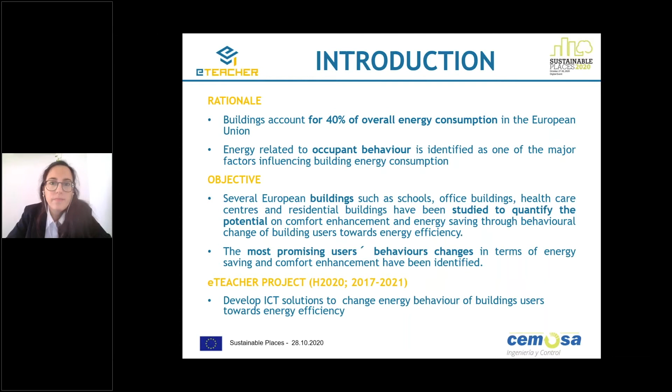The methodology: we have intensively monitored 10 buildings during 8 months, from February to September 2019. The kind of measurements we have collected is at building level and at room apartment level. We have collected energy consumption data on HVAC, on appliances and lighting, and also the total energy consumption of the buildings.

We have collected data related to indoor conditions of the rooms and apartments - temperature, CO2, lighting level, relative humidity. We have also collected outdoor conditions - temperature, solar radiation, and relative humidity - and other parameters such as occupancy or windows open have also been collected.

This is the experiment design and the pilot buildings. I want to talk shortly about the pilot buildings. We have 2 schools in Spain, one residential building in Spain and 4 residential buildings in Romania, 2 healthcare centers in Spain, and also 1 office building in Spain.

The kind of monitoring technology that we have used in our experiment - this is just to illustrate the kind of technology. We have used several solutions existing in the market. For example, this is the monitoring in one of the apartments in Romania. We have used, in this case, Homematic and Netatmo technology.

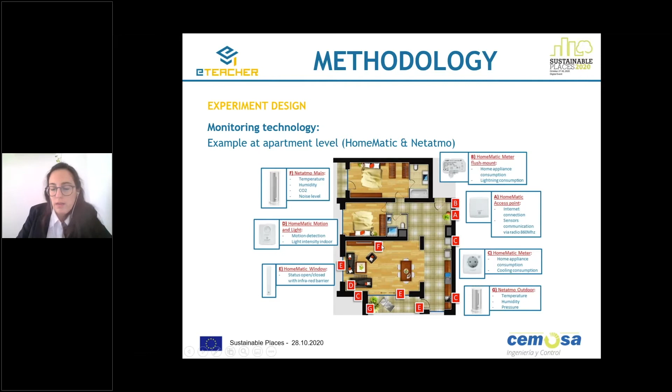This is one example of the monitoring technology that we have used. Another example is this one. Here we see the monitoring devices that we have used at building level, and here we see the monitoring devices that we have used at room level.

At room level, we have used Z-wave technology for temperature, CO2, and relative humidity, for windows opening, for presence and luminance meter, for appliances submetering, lighting submetering, and the temperature of the fan coils.

We have also used at building level a weather station based on Z-wave technology, which is wireless technology in this building. And then we have used some wire technology that uses RS485 to measure the general electric energy meter, the HVAC energy meter, and the lighting energy meter.

This is just to illustrate the kind of technology that we have used. I just wanted to mention that we have used commercial solutions in all the buildings. In general, we have used more wireless technologies than wire technology. This is to provide an idea of the kind of monitoring devices.

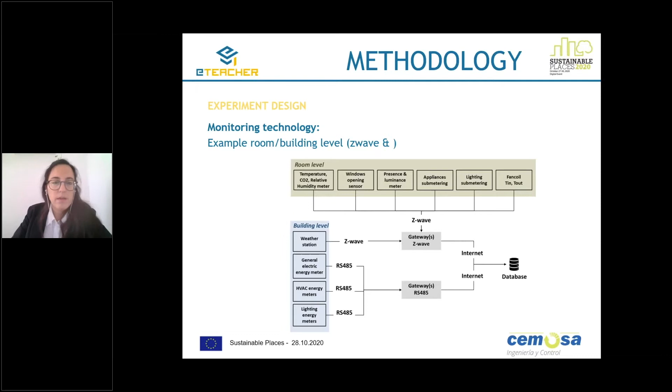I want to talk now about the comfort analysis that we have carried out to quantify the enhancement potential. We have focused on four variables: indoor temperature, indoor relative humidity, indoor luminance, and indoor CO2 levels. And we have set some thresholds based on the standards.

For the temperature, the comfort threshold is between 21 and 26 degrees. For relative humidity, it's between 40 and 60%. For indoor luminance, we have set a threshold of over 500 lux for all the buildings except for the residential building, where the limit is lower, over 150 lux. And then for the CO2 level, our threshold is below 800 ppm.

And how we calculate the potential to enhance comfort: we have calculated the number of hours where the rooms are occupied, and these variables are out of the thresholds where comfort is guaranteed.

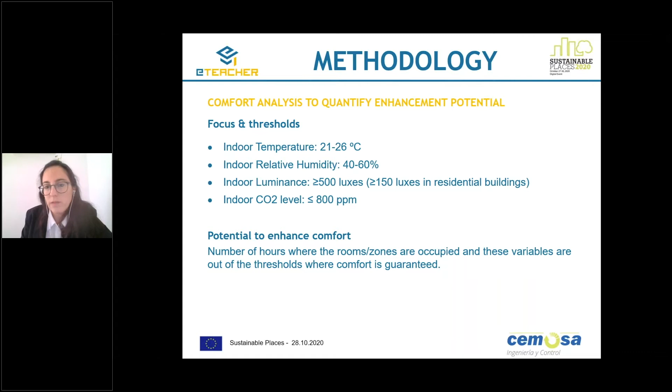Okay, this is the analysis for the comfort, and then the analysis to quantify the energy saving potential. We have defined a number of target behaviors.

For example, related to the use of the lights, we define two target behaviors: turning off lights when leaving a room or at the end of the day, or target behavior 2, which is reduce the use of unneeded lights, checking lighting levels and needs during the day.

Then related to the appliances, we have defined two target behaviors as well: turn off appliances at the end of the day, and appliances off when away from room for 1 hour or more.

Related to the HVAC use, we have defined 5 target behaviors: reducing the thermostat temperature for heating when overheating, increasing thermostat temperature for cooling when undercooling, ensuring that if heating or cooling is on, windows and doors are closed, turning off the HVAC system if the room is not used for more than 1 hour, and ensuring the air conditioning and heating are not working at the same time.

Okay, so the way we have estimated the energy saving potential is based on the monitoring data. We have counted the number of hours that these target behaviors are not carried out by the users of the buildings. Then we have calculated the energy wasted during those hours, and finally the cost of the energy wasted during those hours.

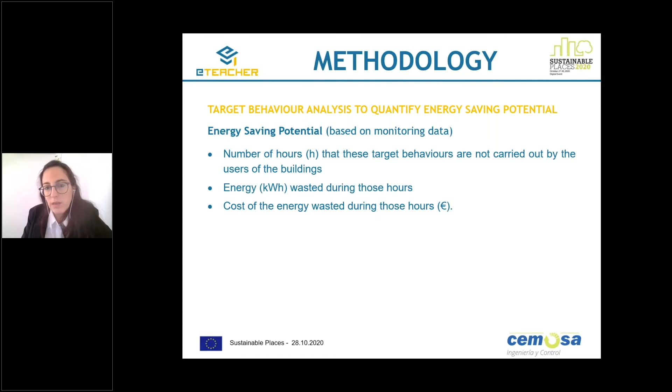For example, for target behavior 1, which was turning off lights while leaving a room or at the end of the day, we count the number of hours in every monitoring room that there is no one and the lights are on. In this case, we use two monitoring variables: presence and lighting consumption. So when the presence is 0 and the lighting consumption is over 0, then we count that hour as this target behavior not being carried out.

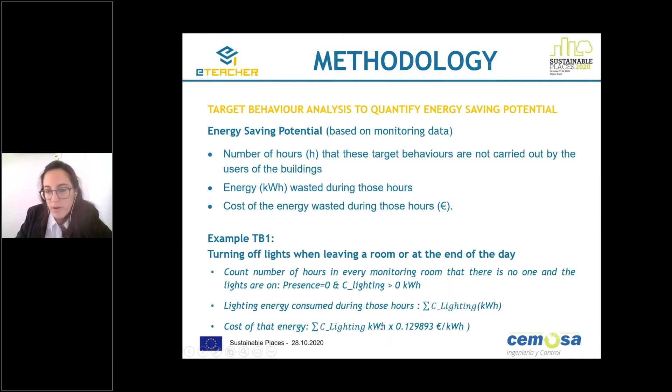Then we calculate the energy consumed, the lighting energy consumed during those hours, and finally we calculate the cost of that energy, just multiplying by the price of the energy at that time. So this is an example.

And then I will present some results related to the comfort analysis and the potential to enhance it, and the energy saving potential. I'm not going to explain the results of all the buildings, I just focus on 4 buildings. But then in the conclusions, I will provide an overview of all the buildings, because otherwise it's too repetitive.

Okay, so in the case of the office building in Spain, we have in this graph, we have monitored 2 of the 2 floors, which are big offices.

So this is the data related to floor 1, this is the data related to floor 2, and this is the data related to both floors. These are the percentage of occupied hours where there is no comfort because of temperature, relative humidity, CO2 levels, or lighting level.

Just to clarify, since it's too small to read, this is 100% of the occupied hours, this is 20% of the occupied hours. What we can see here is the main problem related to comfort is the lighting level. About 70% of the occupied hours are out of the lighting level range, and regarding relative humidity, also about 60% of the occupied hours are out of range.

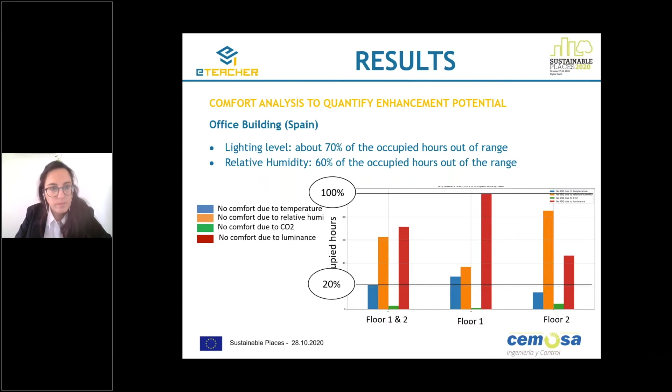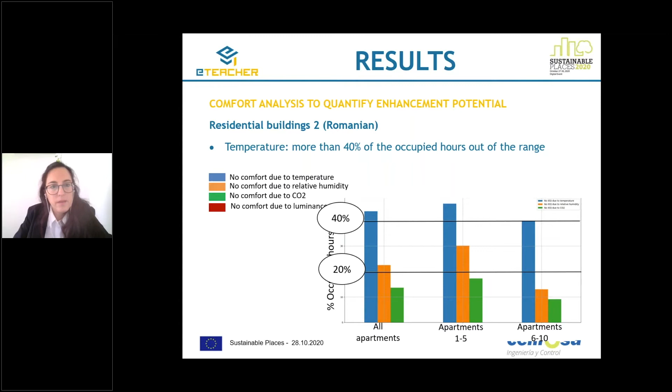So these are the results relating to comfort that I wanted to show.

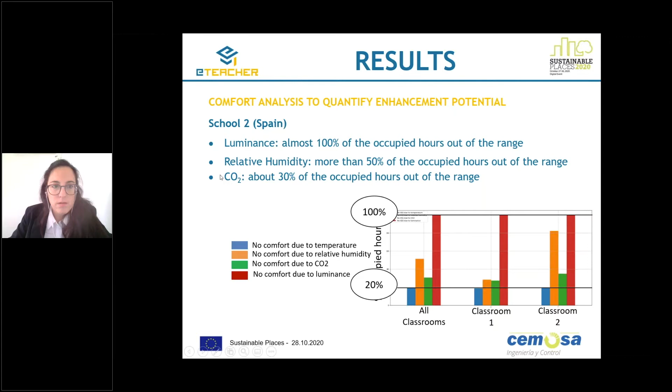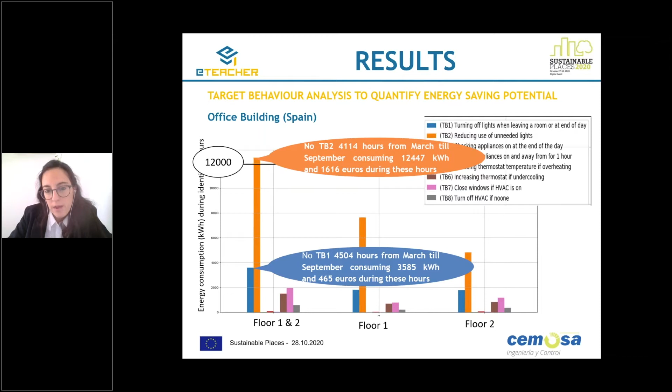Regarding target behavior 1, which is turning off lights while leaving a room or at the end of the day, this target behavior was not carried out during more than 4,000 hours from March till September, which means we could have saved more than 3,500 kilowatt hours and more than 400 euros during these hours. The conclusion for this building is that the target behaviors with higher energy saving potential are those related to the use of lighting.

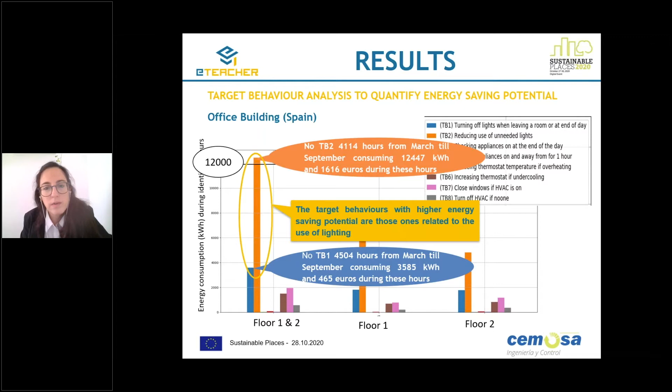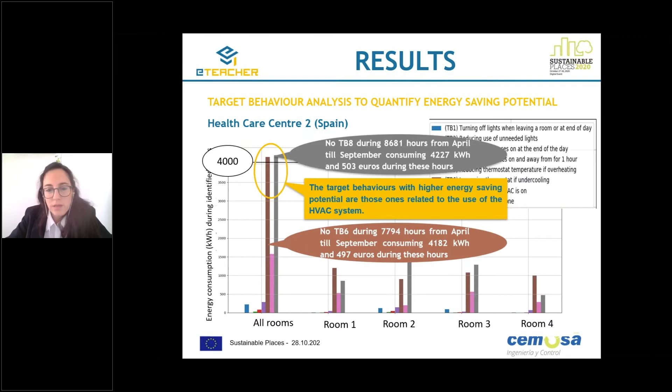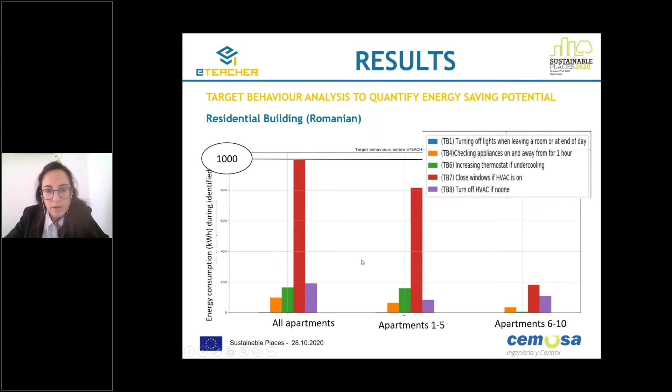So this means that the higher energy saving potential is related to the use of the HVAC system in this case. Regarding the 4 residential buildings in Romania, this is 1,000 kilowatts hour, and we can see that the main problem is related to closing the windows if HVAC is on. This happens during more than 900 hours, and they could have saved 900 kilowatts hour and more than 100 euros.

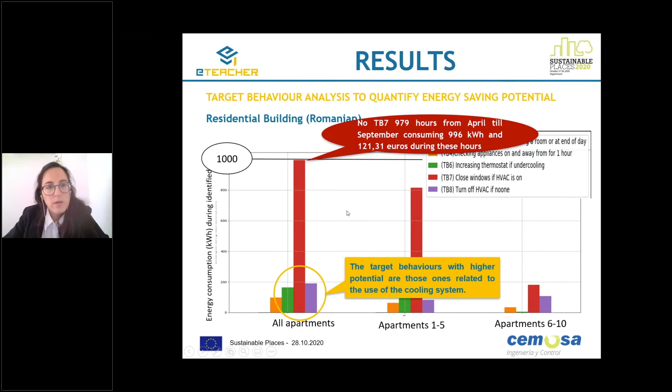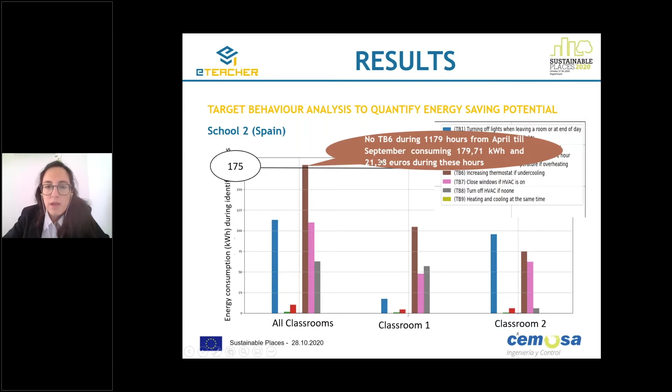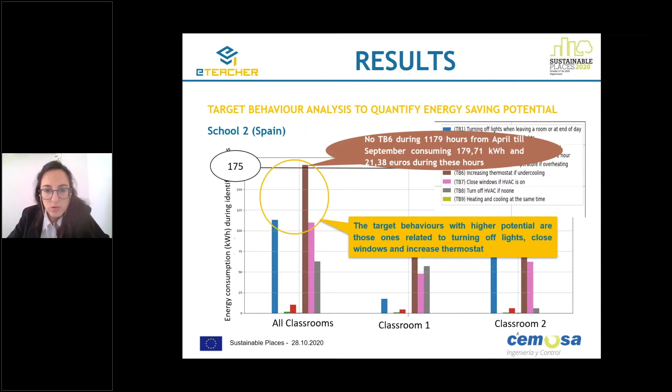And the target behaviors with higher potential are those related to turning off lights, closing windows, and increasing thermostat. So the conclusions show that regarding comfort, here is the percentage of occupied hours that comfort is not achieved because of one of these reasons: temperature, relative humidity, CO2, or luminance in each of the buildings.

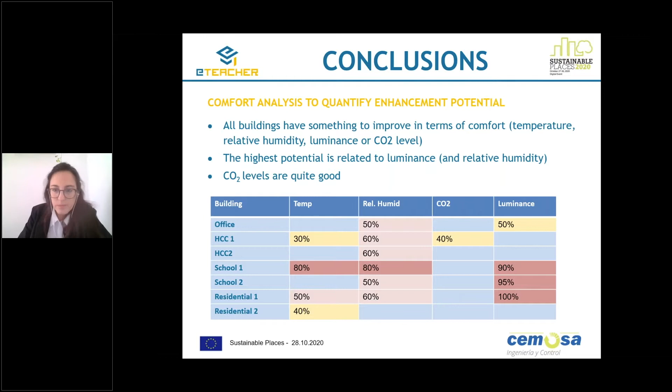We can see that all the studied buildings have something to improve in terms of comfort. In the case of these buildings, it seems the higher potential is related to luminance. And we were also surprised because we have seen the CO2 levels are quite good in this case. So this is good and important.

Regarding the target behaviors, the red color are those target behaviors more promising in terms of energy saving potential. So we clearly see that the most promising are those related because they happen more and because they have more saving potential. These are related to the cooling system, specifically increasing the thermostat if undercooling, closing windows if HVAC is on, and turning off HVAC if no one.

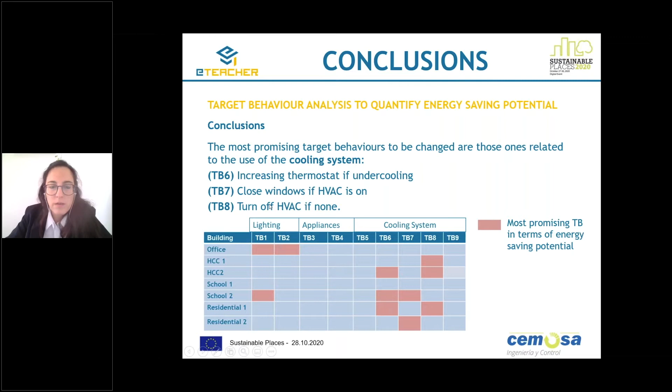And the next step is to check other weather conditions. We are also including now an office and a school in UK, and also to deploy these ICT solutions developed by the eTeacher project to see if we can really take advantage of this energy saving potential. This is the eTeacher demonstration that has started this month, at the beginning of this month, so we will see what happens.

And finally, to validate this analysis with the results of the eTeacher demonstration to see if this analysis is right. And that's it. Thank you very much. If you have any question, I'm happy to answer.

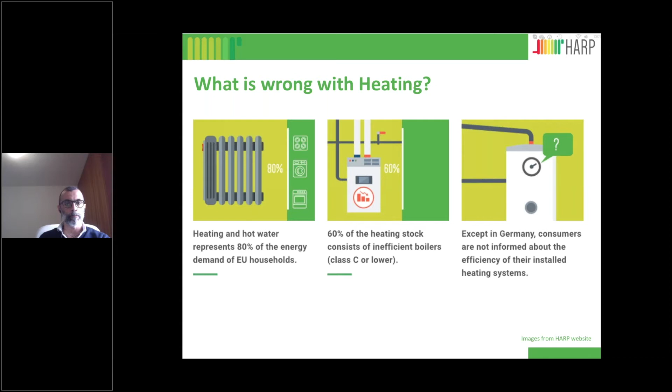And we believe this information is crucial to trigger a replacement of the least efficient heating appliances. So in order to investigate this problem, the HARP project was designed with the main aim of raising consumer awareness about the inefficiency of their heating systems in particular. The project basically helps consumers to understand the level of energy efficiency of the installed appliance and what they can obtain if they decided to change for a more sustainable and efficient version.

There are two principal objectives of the project. One is to increase the replacement rate of old appliances and therefore reduce associated energy consumption in the 5 countries where HARP is being developed. The second objective is to draw lessons from the implementation of a labeling scheme that is produced within the project, of course.

So, HARP will mainly build on the experience of the mandatory labeling that is already in place in Germany.

The purpose is that recommendations will be used for the implementation of labeling methodologies for installed heating systems at the European level, but more specifically in countries not participating in HARP.

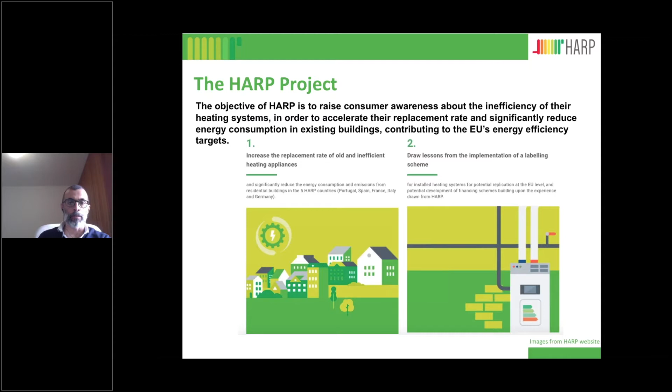The HARP project is being developed by 18 partners from 5 countries: Portugal, France, Italy, Germany, and Spain. There are a lot of partners, as you can see, but it's coordinated by ADENE, which is the Portuguese National Energy Agency. It runs from 2019 to 2022.

As a main output, we set out to develop an application that will provide consumers with an indicative assessment of the performance and cost of their heating system, and we'll also be able to compare alternatives in the market.

There is, of course, work being developed in terms of the typified quantification of existing heating appliances in these 5 countries, for instance. But in this project, we wanted to take it a little further and try to tackle issues that are normally not addressed in this kind of study.

The most common argument for the promotion of energy efficiency investments, such as the replacement of heating systems, is mainly related to the potential energy and economic savings that are achieved. This is the main argument.

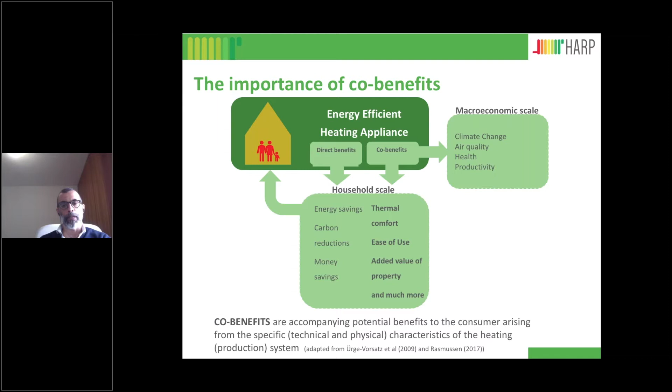And there is the more private perspective, if you want, at a household scale, for instance, that is from making the decision to adopt energy efficient technologies, which is known to be strongly connected with these additional benefits that can range from thermal comfort, easier use, added value of the property, things like that. So we wanted to address that.

We realized that although it's important, and it's really recognized in the literature and research, it's not a very well explored area at this scale, at least. I think the macroeconomic scale is more developed, but at the private perspective it's not so much.

So in order to have a clear picture of what's important in each national context of HARP, we set out the methodology for our study. This included a first literature review in order to identify the co-benefits that should be included in the analysis.

Then we tried to clarify our objectives. We wanted to understand what is the relevance of each co-benefit for the users or consumers, and how these co-benefits can be valued, because normally the value of investments is just analyzed in terms of economic and energy savings, in terms of economics in general.

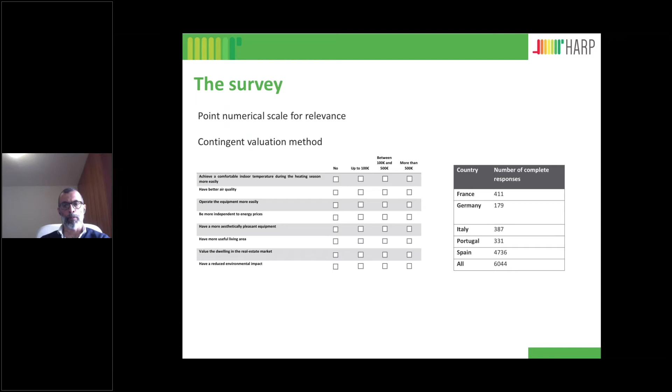The results were analyzed using a weighted average value for age, gender, and country. So every completed answer was considered.

In terms of results, our analysis so far allows us to produce a first view on the problem. In terms of degree of relevance, we can observe differences regarding the relevance given to a determined co-benefit depending on the national context. For instance, Italy has the lowest value regarding the relevance of ease of use, but one of the highest in terms of thermal comfort.

As expected, thermal comfort is really relevant in all contexts. On the other hand, results regarding Germany suggest a low degree of relevance regarding aesthetics, but independence from energy price as a co-benefit is highly relevant.

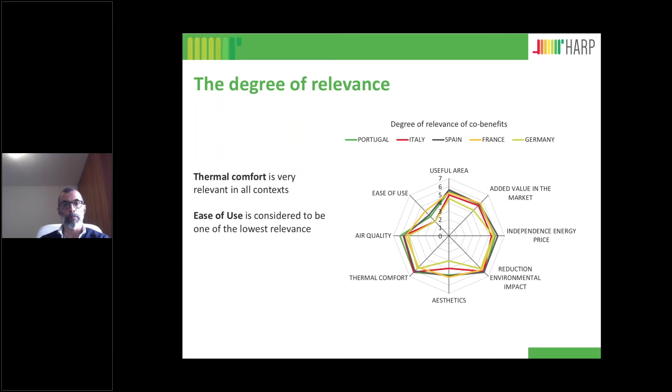We also realized from the respondents' answers that men, on average, attribute less degree of relevance to the identified co-benefits than women. We analyzed all the results per gender, per income, and per age - I think this was the most interesting, bringing in gender and income.

Another perspective to highlight the problem is when you look at relevance by income levels in each country - there are significant differences regarding levels of income in some national contexts. For instance, in France, respondents with a lower level of income, which we established at a threshold of 2,000 euros a month maximum, attribute lower degree of relevance to the majority of co-benefits, except for ease of use. Another interesting point is the attribution of higher relevance to added value in the market from respondents with a higher level of income, in Germany for instance.

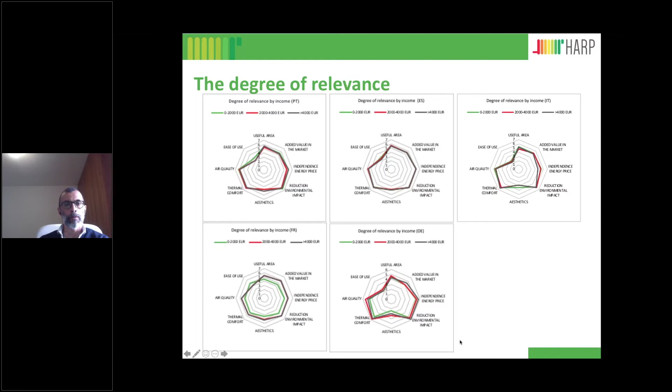In particular, co-benefits such as air quality, ease of use, independence from energy prices, thermal comfort, and reduction of environmental impact were the most valued in this space, which we call the tier of the 100 euros.

In the space between 100 and 500 euros, the most valued co-benefit was independence from energy price. Around 30% of the respondents answered that, closely followed by thermal comfort and air quality.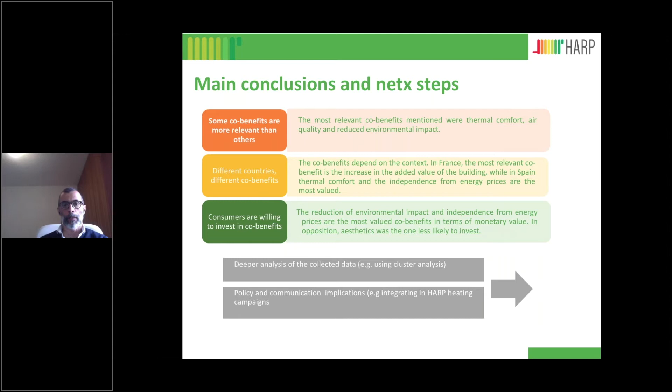So as the next step, we want to make a deeper analysis of the collected data, for instance using cluster analysis, and we want to reflect and understand how we can integrate this kind of information into policy and communication campaigns. So you can know more about the project on our website, and I'm looking forward to your questions. Thank you.

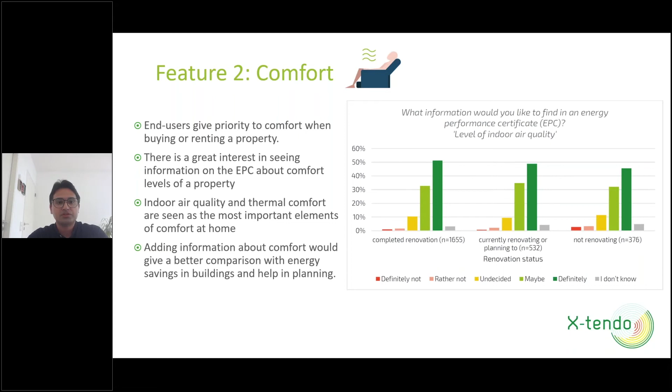Moving on to the third feature that we are developing in X-tendo: outdoor air pollution. This feature outlines the impact of buildings on outdoor air pollution, and also the impact of outdoor air pollution on indoor air quality. It's an interesting feature, but might not be relevant for all countries where air quality is really good. But for countries like Poland and Romania, they showed great interest in this kind of feature, where outdoor air pollution is a problem in cities and in the country in general.

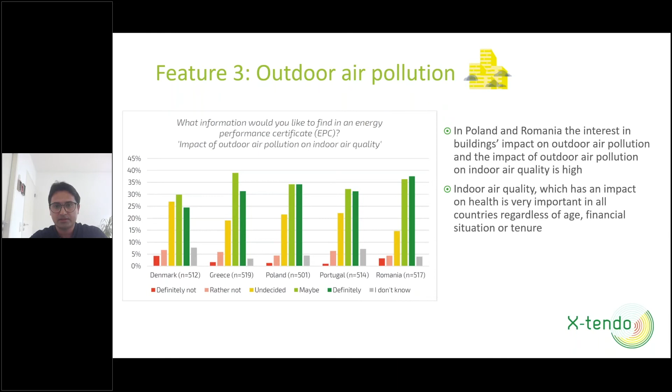People would like to get this kind of information in their EPCs: is their dwelling contributing more to outdoor air pollution or not, and is outdoor air pollution having a higher impact on the indoor air quality of their buildings. You could see that there is definitely an interest from Greece, Romania, and Poland, and that is something interesting to see here.

Moving on to feature number 4, real energy consumption. We know that operational energy versus the simulated or calculated energy is a question that is being raised consistently within EPCs, and it's one of the most important aspects in EPCs, that we should know what is exactly being consumed, not calculated.

The real energy consumption feature is going to outline real-time feedback on energy use, and we asked a similar question to the end users. On the graph, you can see there was high interest, with respondents saying that if they could see real-time feedback of their energy use via a smart meter, it would be very helpful in understanding or managing energy use at home. The majority of respondents find this information important for inclusion in EPCs.

There was a difference in countries like Denmark, which are forerunners, where this information is already provided. That's why there is less interest in including such a feature in EPCs there. Our intention of including both forerunner and follower countries was to understand that there's a different appetite, a different level of requirement for these features in different countries, and that helps us develop them accordingly.

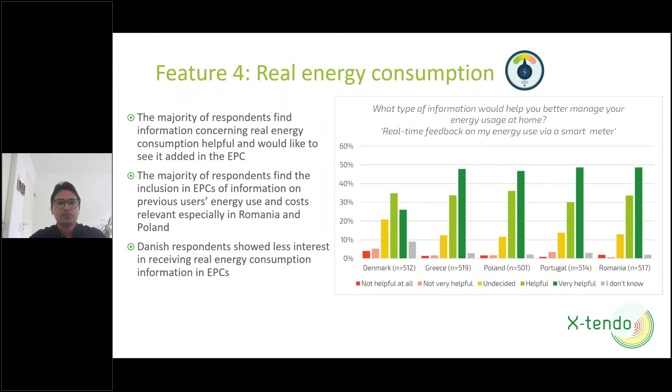Moving on to the 5th feature, the district energy feature. It's also very interesting. Among the 5 countries, Portugal was not surveyed for this particular feature because there's no district heating there. We surveyed the other 4 countries, and district heating was more interesting for homeowners than tenants, especially in denser areas such as cities.

There was interest by full-time employees and full-time parents, who were significantly interested in district heating information, such as how far the district heating grid is from their home, and what the efficiency of the district heating grid is. We asked a lot of questions, and the more information is available in the report. This was also one of the interesting features to survey with end users across different countries.

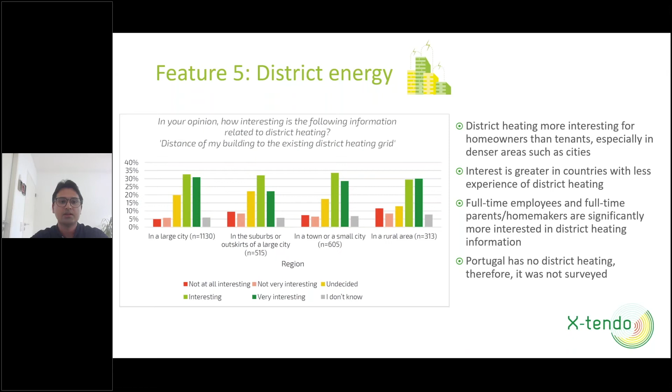Moving on to feature number 6, EPC databases. I would like to explain that EPC databases is not directly related to the end users, but is basically limited to the authorities or public authorities who are managing EPC databases.

But we asked the end users if they are interested in information on the energy performance scores of similar buildings nearby. This kind of information is available in EPC databases of some countries, where people can check what the general energy performance score of different buildings is in their postal code. That gives you an understanding of whether your building is efficient or not compared to other buildings in the region.

And it has an impact on a lot of other aspects, even the financial value of your building and things that are like that. So EPC databases is a feature being worked upon in X-tendo, where the databases are being refined and developed in a more cohesive way, where such information can be stored and easily available to the public.

There's a high interest in this information on similar buildings across all groups. Information needs to be presented in an easy, accessible format so that anybody can access it in general. So that's EPC databases. After that, feature 7, which is building logbooks.

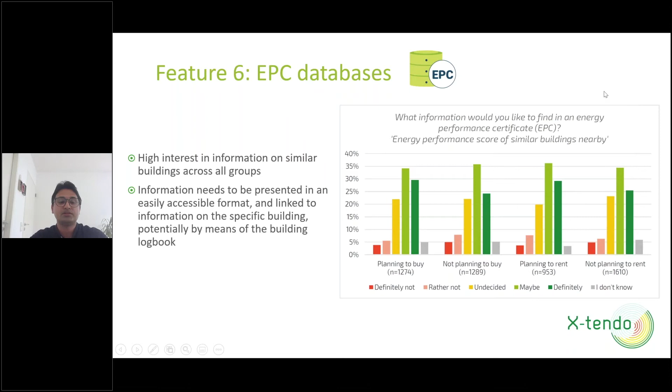Many of you must be aware that different projects are going on in the European Union on building logbooks. It is regarded as one of the most important tools to promote renovation and decarbonization by providing building logbooks. Some countries have already started.

Utilizing building logbooks. But for the project, what we are trying to do is to make a connection between EPCs and building logbooks. We know a lot of information is already collected for the EPCs, so if such a feature could be developed, how can building logbooks be utilized with the EPCs? We asked a question regarding what kind of information is useful to owners and renters.

So we are working on a feature that could be integrated with the EPCs and could provide or record such information, and that would be useful for the owners or tenants in the future.

Moving on to feature number 8, which is tailored recommendations. We know it is very important for an owner or a tenant to know what they can really do to improve the conditions inside their building, such as comfort levels and of course energy efficiency. But they are interested in receiving certain specific information in order to plan for them.

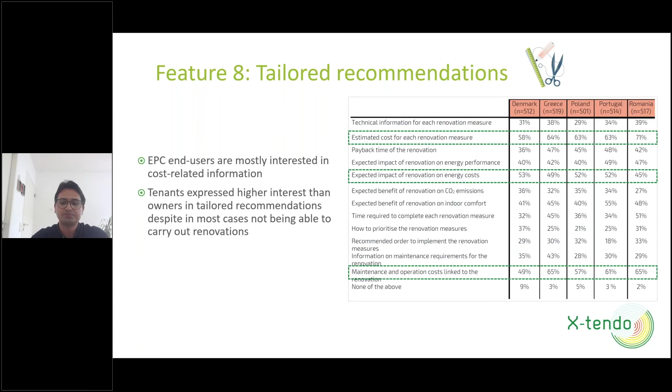Coming to the second last feature, that is financing options. We know that if we are given information on how we can finance our renovation, what kind of bodies we have to approach to get some information, what kind of information I would be looking for if I have to renovate a house or a home.

So this feature is developing key support to the end users, and that would definitely give a push to renovation in Europe. And if such information can be provided with the EPCs, this feature is being developed, and we asked the question among other questions.

It was interesting to see that people 35 plus years of age were most interested in renovation but have lower financial capacity. So there are a lot of cross results that you would see in the report based on demographics, income levels, ages, and location. I couldn't present all of those results here, but it's definitely very interesting to look at how people perceive all these features differently.

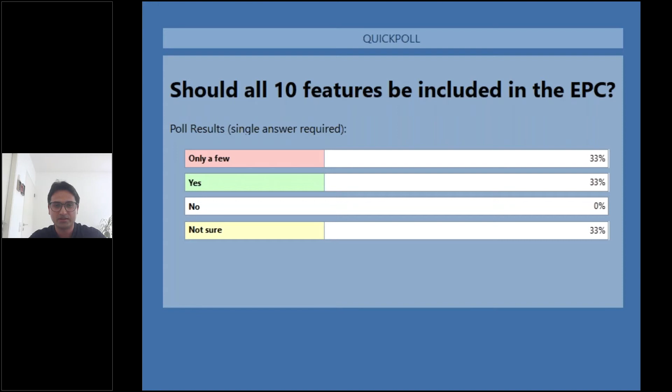Thank you, it's a great question - which feature would be really interesting? It's really difficult to decide, but all of them certainly have interest somewhere in the audience, and I'm happy to see a divided attention across many of them, which definitely shows that some features have more capability and potential to be included than others.

Okay, next there are two more polls. Which target groups are most relevant for new features? The choices are young people less than 30 years old, older people more than 55 years old, families with children, people in urban areas, or people in rural areas. And you can select more than one, I believe.

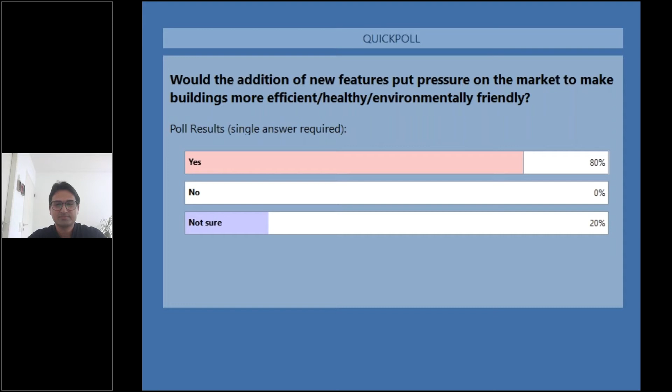So would the addition of new features put pressure on the market to make buildings more efficient, healthier, and environmentally friendly? 80% yes, 20% not sure, 0% no. I agree with the people who say yes, because we are receiving an overwhelming response from our partners who are also in the market and also the public authorities. They're already working on them, especially in Portugal and countries like Denmark and also Estonia. We do expect that it's going to put pressure on markets to bring in more people with trained skills and also new measures taken up to introduce these features. Of course, it's a big task, but I think we are positive about it.

So thanks, Zia, for launching the polls. I would like to now move to the conclusions of the presentation, and thank you for the participation of the audience in the polls. It was interesting to see all the results.

So I would like to conclude here that we saw that younger people are more interested. That is supported with your polls as well. Older people are interested in features like comfort, energy consumption, building logbook, and renovation information in general. Regarding the tenure status, we saw differences between owners and tenants, and the differences were not very large. Tenants do not always have to pay the cost of renovation, but they do find this kind of information useful for their planning, or maybe moving into a house, or buying that property where they're living.

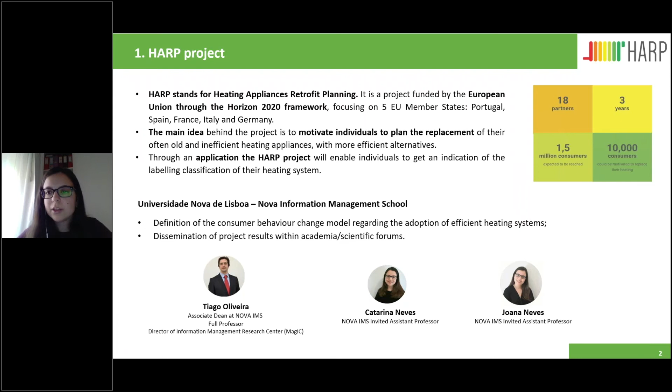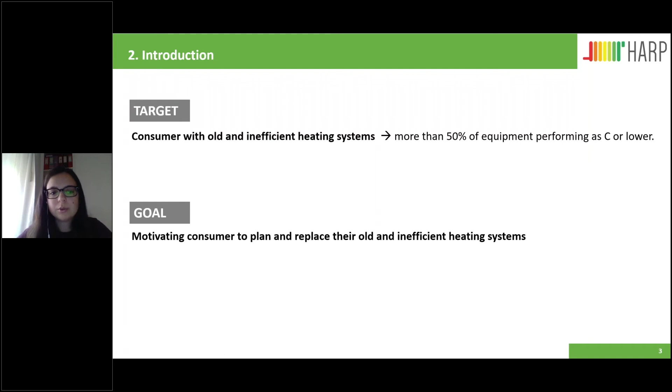So basically, what we propose to do is to define the consumer behavioral change model, which means that we will try to understand what are the drivers of consumer adoption for more efficient heating systems. As we know, more than 50% of the equipment performs at class C or lower, so there is really a need to motivate these consumers to change these inefficient heating appliances.

So to achieve our goal, we decided to carry out a survey, and then some simple statistics and descriptive analysis. Then we go to our main method, which is the partial least squares, and then we will take some results.

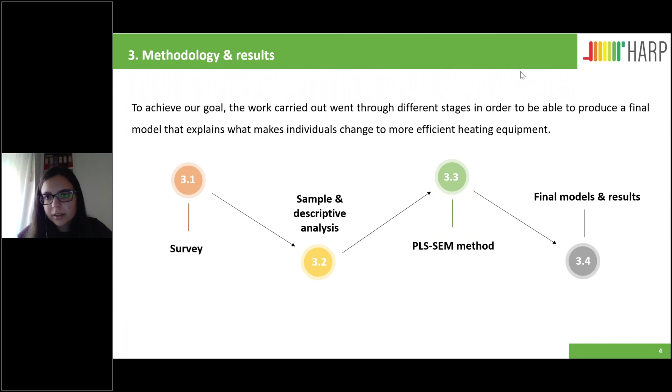So first, we started with some literature review and discussion with the consortium. We needed to see which variables could be affecting the intention for a consumer to change and can be a driver for this change by the consumer. We started looking at existing studies on the topic and gathering variables that could explain this, but also talking with experts, because experts could add other variables that were relevant in explaining this behavior. Then we selected the variables to include in the survey.

Before running the survey through the European countries, we first decided to do a pilot survey, then made some changes, and then ran the final survey. The survey was out for about two and a half months, and we gathered about 6,044 complete responses in France, Germany, Italy, Portugal, and Spain.

After gathering these responses, we decided we needed to see some descriptive statistics of this sample to understand if it's representative of the population, or at least of the people who usually make the decision of changing the heating appliance. Basically all these statistics are really similar to previous studies on the topic. For example, the number of years of education is a little higher than usual for each country, but that's normal because we ran an online survey on a specific topic, which requires a bit more knowledge.

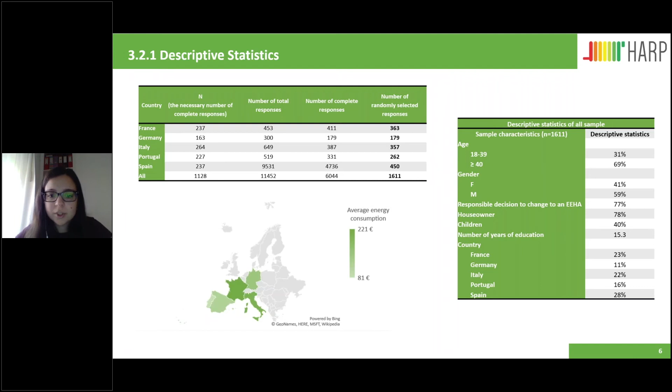Also, looking at average energy consumption, we can see that France has the higher energy consumption in euros, and Portugal has the lower energy consumption.

So basically we did this survey, gathered variables, collected responses, and at the end, before running the big methods to understand this, we decided to do what we call a factor analysis.

In the factor analysis, the idea is that we have a set of variables, like radio, TV, and so on. Instead of using all those variables in our analysis, we try to simplify and find other variables that represent basically the same information, but instead of having, say, 10, we have just 3. We did this for communication channels, one of the variables we decided could impact the consumer's intention to change the heating appliance. For example, radio, TV, and newspaper are really correlated, and they form the communication channel - the media communication channel. This is just one variable.

We did the same here: installers, stores of energy efficient heating appliances, organizations, and people that I know are all gathered into organizational communication channels. Then we have websites and mobile applications, which fall into web media communication channels. Nowadays this is actually really interesting, because it's good to divide web media from the usual media communication channels.

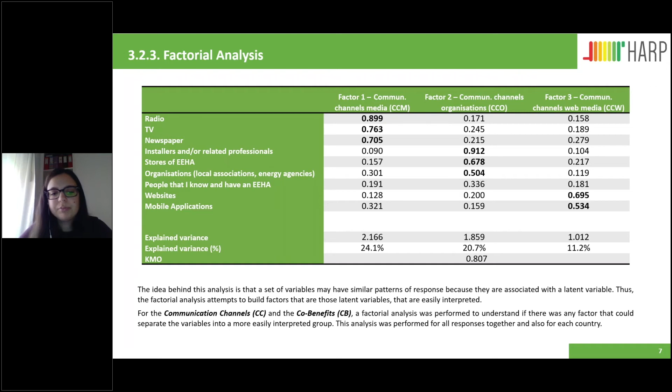We did this for communication channels, but also for the co-benefits. These co-benefits are basically benefits that changing the heating appliance can bring to our health, to the health of the house - other benefits beyond just the temperature. So we're talking about comfort, the health of the house, also some price issues, and so on.

So we had a lot of variables here, and at the end we ended up with co-benefits investment and just co-benefits. The difference between these two is that co-benefits investment relates to my willingness to pay for having those co-benefits, while just co-benefits relates to the importance I give to them, because sometimes I can say, okay, having a more useful living area is important, but maybe I'm not willing to pay for that co-benefit.

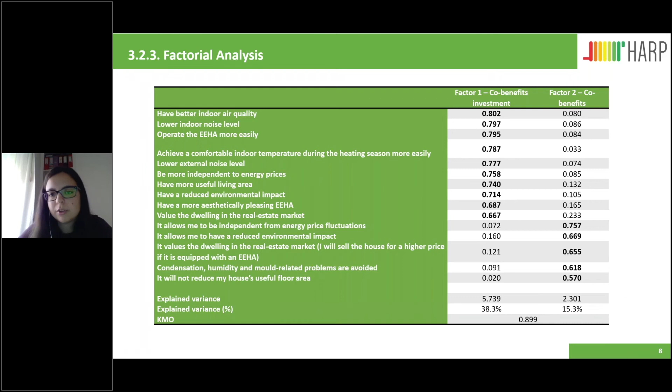So before running the big method, we decided to do this factor analysis, and we ended up with media, organization, and web media communication channels as possible variables that can influence the consumer to change an inefficient heating appliance, along with co-benefits investment and just co-benefits.

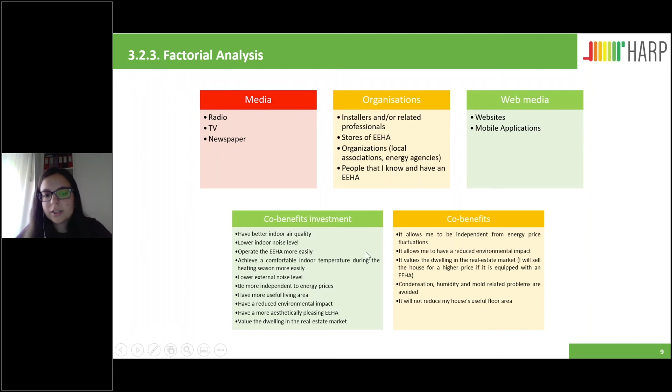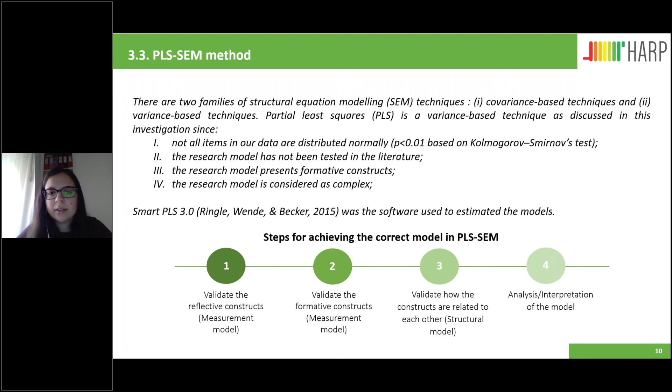Okay, and then we ran the method, which is partial least squares, a structural equation modeling technique. I won't go too deep into the specifications of this technique, but it's a really robust technique, as I'll show here in the model.

And what happens with this method is that, for example, in a direct relationship, savings can be really important for the consumer to change the heating appliance.

What happens with this method is that it's similar to how people think, because we consider a lot of factors at the same time, not just direct relationships. So maybe savings are important for the intention to change, but compared with label, operation and maintenance, engagement, social influence, and so on, maybe it's not as important as other variables. These kinds of insights are really interesting.

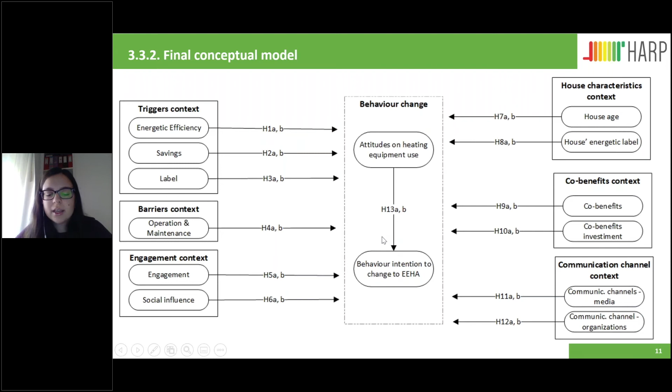We built this model with variables that we believe, based on literature and the consortium, can impact consumer intention to change to an energy efficient heating appliance. We needed to see if our model was good, checking internal consistency and convergent validity, criteria to verify if our model is good and will explain what we want it to explain.

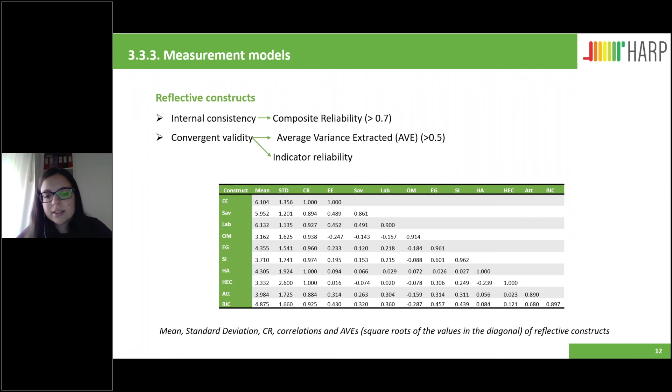So we check the composite reliability, average variance extracted, and indicator reliability, and also the discriminant validity. Basically, some of these measures help us understand if the items we used on the survey to measure savings, label, operation and maintenance are actually measuring that variable.

Another thing that makes this method really robust is that we don't ask directly, is savings important for you to change your heating appliance? With just one direct question, the consumer's answer has a lot of subjectivity. Maybe, is label important? Is social influence important? So we decided to use more questions related to savings or engagement to actually try to measure the impact of that variable, not just with one question.

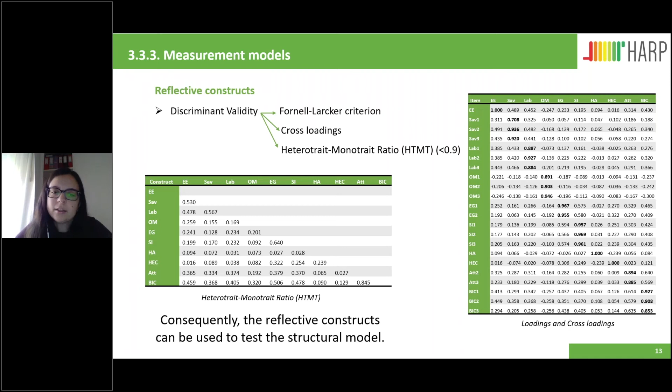So here basically we want to understand if the questions we used to measure savings and so on are actually measuring savings, and all of this was checked. Also, for the formative constructs, we needed to assess multicollinearity with the variance inflation factor, which confirmed that all the items were statistically significant, so we could move on to the structural model.

Here we have the results of our final model with data from all countries together. What we can see is that all the arrows with asterisks are relevant to explain this intention to change to an energy efficient heating appliance. We can explain 62% of this intention with the R-squared, which is a measure of the explanation power of the model.

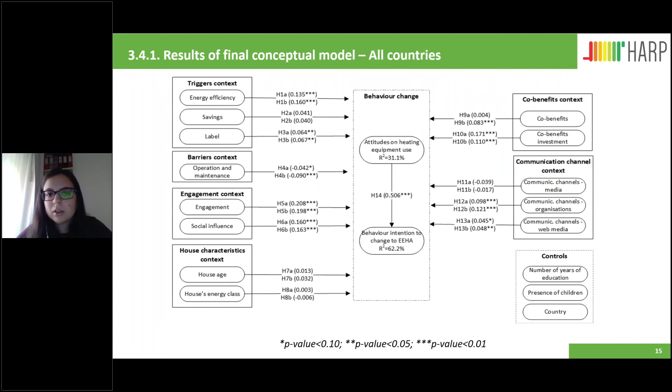It means that we can explain this behavioral intention to change by 62% using these variables, which is actually a lot, especially compared with other studies on the topic. Of course, not exactly the same, but we can see that we have really good explanatory power.

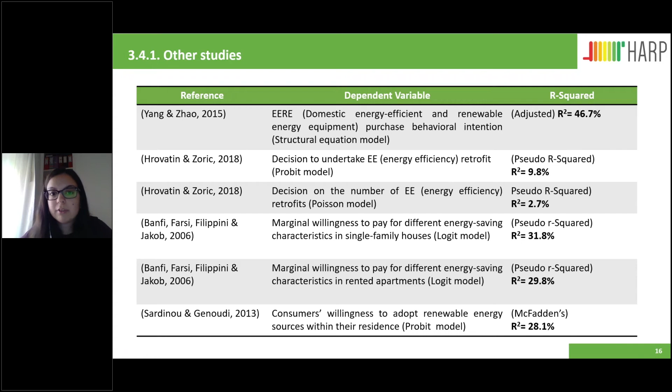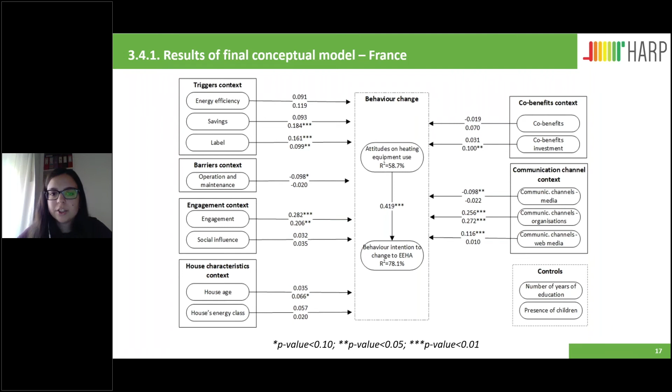The next step was to run this for each country, because for each country some variables will be more relevant than others, also due to living conditions and so on. For example, in France we explained 78% of this intention. Most of the time that means there's more agreement on the factors that actually make a consumer change to an efficient heating appliance.

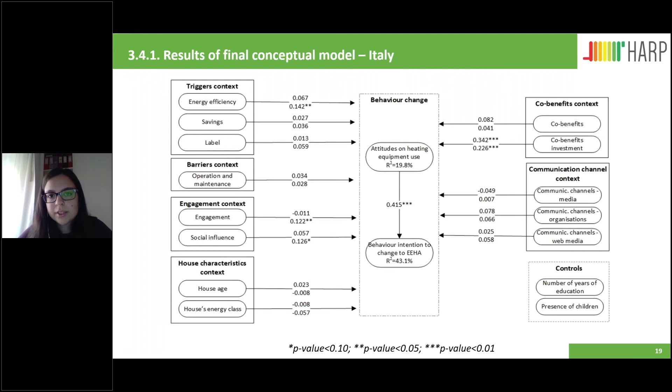In Germany, we have 74.5%, Italy 43.1%, Portugal 62.7%, really similar to Spain, which also has 62.8% power of explanation.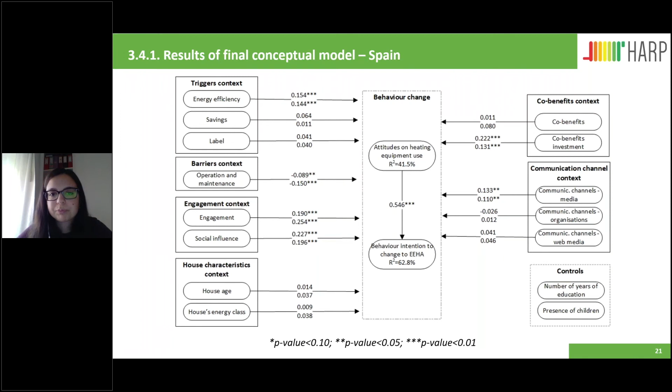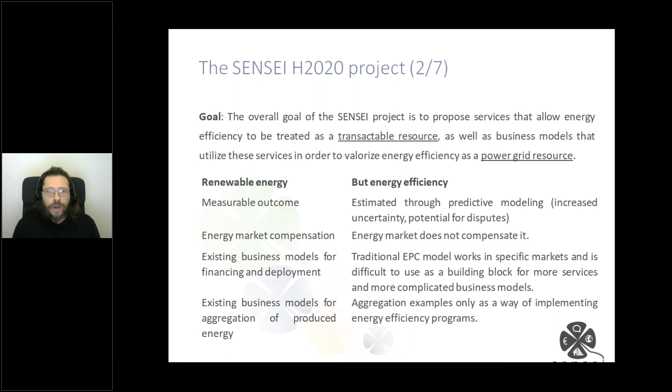If you go to the website of the project, you will see a lot of mentions about pay for performance, P4P. As an idea, it's one way to say that you actually compensate something based on how it performs, not based on its costs, not based on deemed results, but on what actually is the outcome.

And we use the concept of pay for performance in Sensei as a way to bridge all the services and business models. So it's a universal interface between all the involved parties.

And again, the ESCO model is actually a performance-based model, so we're not trying to reinvent the wheel. We just want to expand it, mainly in a direction that allows the design of programs that support energy efficiency by compensating—and this is where 'pay' comes from in pay for performance—the retrofit projects based on what they deliver, energy savings for instance, and not expectations and deemed results, etc.

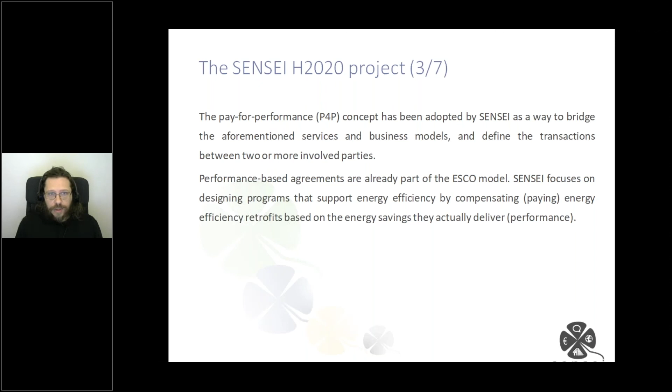Now, in terms of this idea of compensating energy efficiency as a grid resource, we have identified three different ways through which we can link energy efficiency to the local power grid and its operational goals and challenges.

Saying that energy efficiency has impact on the grid is self-evident. You can reduce demand, and this may free up resources in terms of distribution lines or capacity assets. But the challenge is to actually link them together in a coherent way.

We start with plan A, which is the direct procurement of demand side resources. And then we say, okay, if we find as a project that there's not so much involvement and endorsement from power market actors, then we can fall back to plan B, which is energy efficiency as a collective asset in energy communities, and then even go further to plan C, which is just using the concept of pay for performance as a way to design local and regional programs for energy efficiency financing.

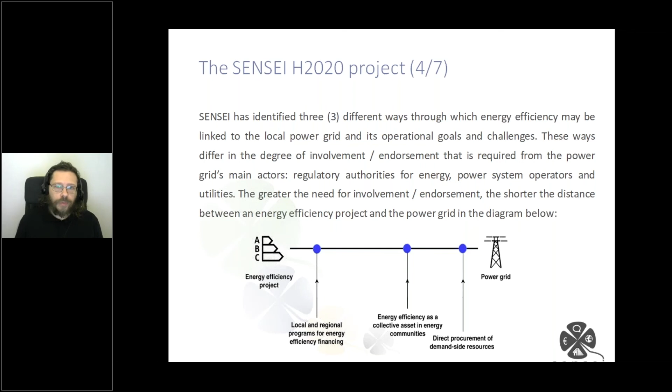I have one slide for each one of these three different ways. So what do we mean about direct procurement of demand side resources? The idea actually comes from the existing paradigm in California and what the California system operator, CAISO, does in terms of supporting energy efficiency as a grid resource.

And there is this bifurcation decision where they actually split everything into two buckets. In one bucket, you have demand side resources that can be optimized, dispatched, controlled by the system operator—you can think of it as demand response. And then the other bucket is what they call load modifiers.

Load modifiers are resources or programs that are not seen or optimized or dispatched by the energy or capacity market, but nevertheless they do have an impact on the load shape in a way that actually improves, makes easier, the system operator's operation. And in that sense, it has value. One way you can think of this is in terms of load shaping, how load is shaped.

It's shaped in such a way that there is less need for peak capacity, or less need for ramping reserves, when you have the duck curve effect in California, where you have to ramp up electricity generation to go from a period with low demand and a lot of renewable generation to a period during the evening hours where you have lower energy generation but higher demand.

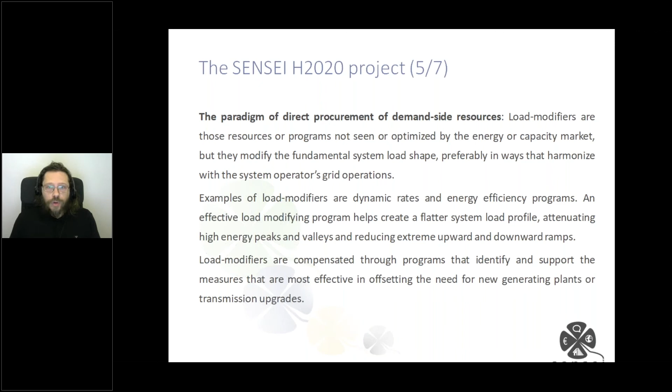Then we say, okay, let's have another option too. This is an option that focuses on energy communities. There's a lot of discussion about energy communities right now. Usually when we talk about energy communities, we're talking about a collaborative activity, and usually this is related to energy generation, production of electricity. But we're actually in a process in the Sensei project to see how energy efficiency can be part of the operations of an energy community.

Because if you think about it, in an energy market, there's no equivalence between producing energy and conserving energy. But in an energy community, there is. If the goal of an energy community is to increase its energy self-sufficiency, for instance, both producing electricity and then sharing it among its members, and producing savings, are actually equivalent in terms of the attainment of the same goal.

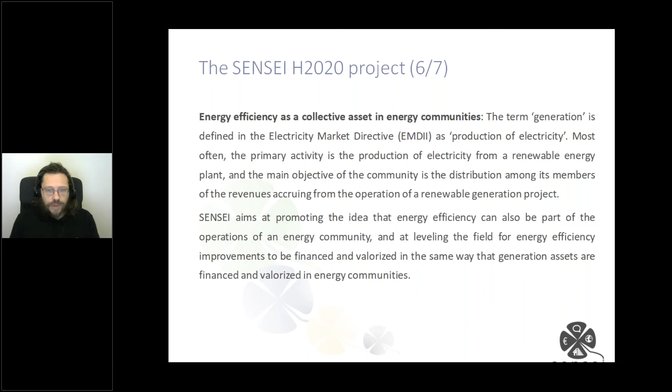And the last idea, the last plan, is to engage with public institutions with both a budget and a mission to promote energy efficiency, and facilitate the design of energy efficiency programs that link compensation with specific performance indicators. So not just give money based on expected costs, but link compensation with specific performance indicators.

The nice thing about it is that the performance part of pay-for-performance can include a lot of indicators. Some of them could be related to producing energy savings, promoting new technology, but also social aspects like mitigating energy poverty. So not only induce energy savings, but induce savings for households that actually suffer, or risk suffering, from energy poverty.

Given all this context, where measurement and verification comes from, the idea is that anything we propose in Sensei, in terms of business model, you can think of it like this: there is a definition of performance. You define performance through performance indicators. You link compensation agreements with these performance indicators, so these performance indicators trigger the value allocation between different parties. And you need a measurement and verification process because you need to collect data and estimate what you need to estimate so as to quantify these indicators.

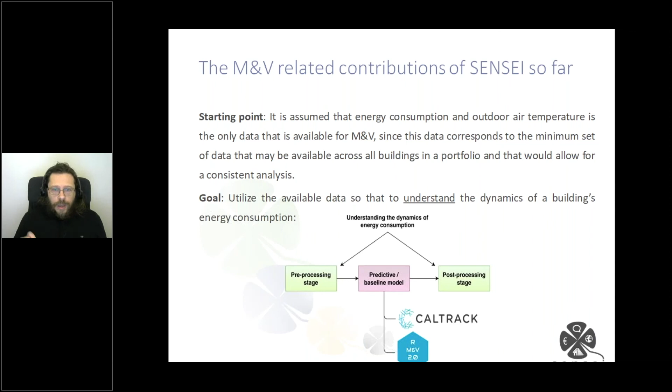Two slides in terms of Caltrack. So Caltrack builds on the time of week and temperature model. It's a simple regression model that has coefficients for the different hours of the week.

And then it splits its modeling approach per month, so you have one model for each of the 12 months in a year. And they go one step further: when you fit one model to a specific month, you also use data from the previous and subsequent calendar months, but you discount them with a weight of 0.5 when fitting the model.

So what's the rationale behind doing that? The idea is defining a neighborhood around your data. Anything that belongs to the same month is very close to my data, so I want to use it as is. Everything that is one month before or after is away from my data, but not so far that I want to discount it entirely. So let's use it with a 0.5 coefficient, and anything outside this range is completely discarded.

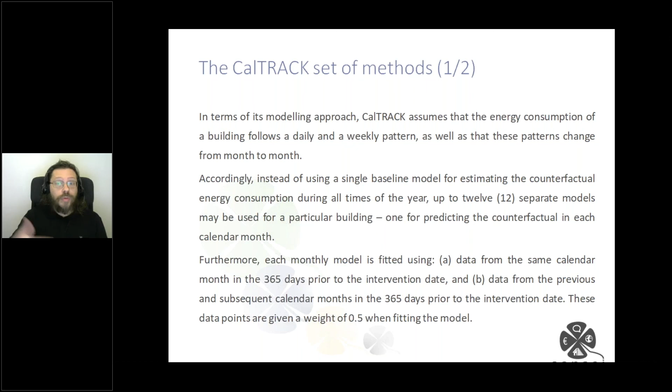And one of the things we do is actually try to improve on this design.

If one starts measuring all the parameters, they have 7 or fewer temperature features because they have a very flexible way to capture U-shaped dependencies between outdoor temperature and consumption. Then you have all these dummy variables indicating the time of week, 7 days times 24 hours, which is 168 features.

And there's also a binary variable you can think of as multiplying everything above, corresponding to whether the specific hour of the week is an hour during which the building is occupied or not. There's a heuristic that defines that. It's not a heuristic that works always, but in many cases it is meaningful.

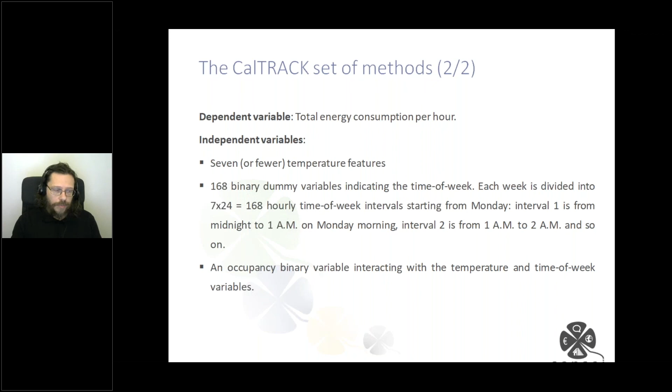So this is the Caltrack approach, and you will see how we actually try to improve this. One way to improve it is through a pre-processing stage that does at least four things.

The first is to evaluate the adequacy of the available data you have. It's pretty obvious: you have to check if you have enough data to do any type of predictive modeling.

Then we identify common and uncommon patterns in daily energy consumption, what we call day typing. Why do we do this? Because we don't want to allow the baseline model to see and learn patterns whose persistence we can't guarantee in the future. If a pattern is recurring a lot, it's frequent, you can assume it will stay frequent. But if it's very infrequent, should the model see it and learn it or not?

Then we want to define the locality boundaries, the neighborhood around our dataset. Linking back to the Caltrack case, implicitly Caltrack assumes that, for hourly predictions, everything at the same hour of the week in the same month is very close to me, so I can use it. If it's in the month before or after, it's close enough to borrow something, but let's discount it with 0.5. Anything else should be discarded entirely.

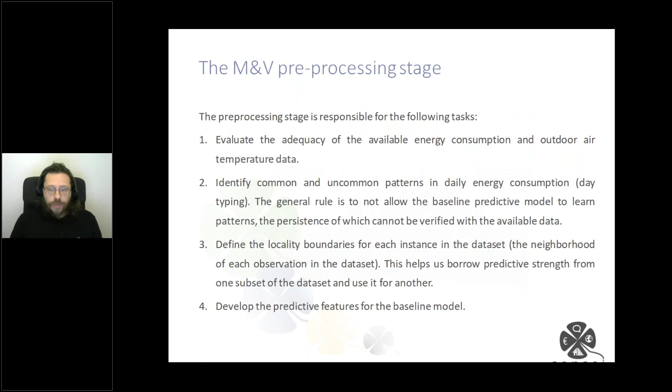So I have a few slides that explain day typing. Right now it's more important to convey why day typing is important; the actual process is outlined in our deliverable, which I'll explain at the end of the presentation. But very briefly,

let's go through an example. This is an example dataset. In Sensei, we have data from buildings, these are buildings of the partners, but we also try to use a lot of open source data.

Open data, so that anyone can replicate what we do. One such dataset is the building electricity consumption dataset that Schneider Electric has made available, and the building with site ID 50 is depicted here as consumption and temperature.

What we use as a way to identify these different patterns is something called distance and matrix profile data structures. There's a dedicated website for that. It's a pretty straightforward process, very efficient to calculate. There are a lot of open source libraries that can calculate both distance and matrix profile data structures very fast. It's also a process that's very easy to parallelize, so you can use more than one core and apply it on very big time series, much larger than one would expect in this kind of application.

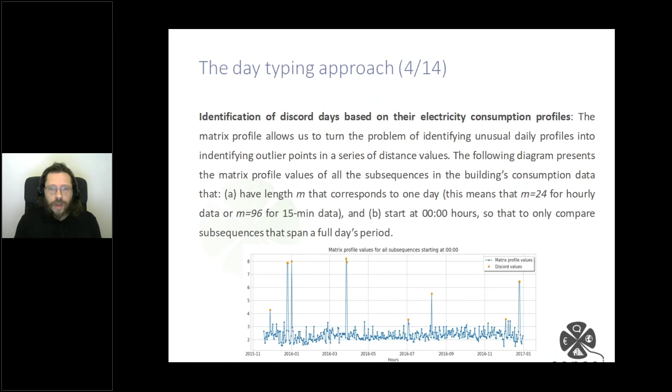And even visually, one can spot at least 3 patterns. One can spot cases where the high load period is from 9 o'clock in the morning to 7 o'clock in the evening. Some cases where consumption actually starts to drop at 1 p.m. There's also this spike at the early morning hours that is repeated but strange, seems pathological.

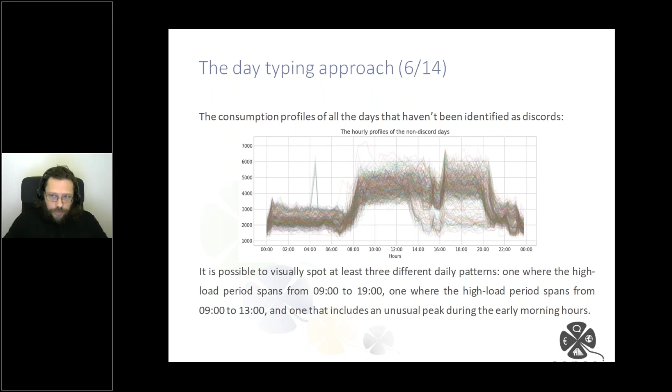And the question is how can we actually allocate all the consumption profiles so that we identify different clusters, we identify patterns that we can actually spot visually.

Very briefly, we don't do it through whole days. We actually prefer to split the profiles into 3 non-overlapping 8-hour intervals. This makes things more robust. It's easier to spot differences where you have a smaller span to care about.

The process is a repeated process that first finds... so the main idea is that we want to identify a very small number of recurring profiles that are very different from one another, and then just classify or allocate all the remaining profiles according to how similar they are to these profiles.

We do this in an iterative process where we find the minimum value of the matrix profile, because that means it's a repeated pattern. And then in each case, we update this matrix profile by dividing it by the distance profile of each time-selected reference pattern.